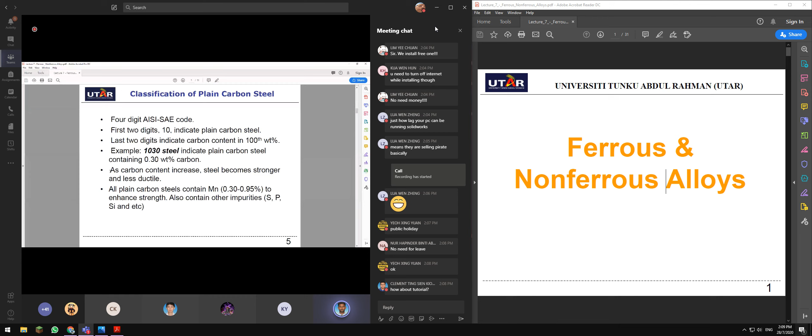Okay, now we are at week 7, so week 7 is lecture 7. Guys, rest assured, for today's topic - lecture 7, 8, 9, 10, 11, 12, and 13 - most of the content will be theory, more information rather than calculation. It'll be very interesting, because lecture 1 to lecture 6 you learned the fundamentals, the know-hows in atomic perspective. Lecture 7 onwards, everything will be on the application side: what kind of application you can use this material for, and what properties this material possesses. You have metals, ceramics, plastic, processing of metals, manufacturing processes of materials, and so on. All of that from lecture 7 onwards will be on the application side, so things will be much more interesting. Let's go through it.

For lecture 7, I'm going to teach you the types of ferrous and non-ferrous alloys. So guys, what is ferrous and non-ferrous alloy in the first place? You can write it down.

Ferrous means an alloy that contains iron. Non-ferrous means an alloy that doesn't contain - I don't like to use 'doesn't contain', okay. It does contain iron, but in a very insignificant quantity. The quantity is insignificant, not significant. Some people say it doesn't contain, and so on. Wherever there is a content of iron, it does rust. Wherever the quantity of iron is reduced to an insignificant scale, it means there will be no rust. So that is ferrous and non-ferrous alloys.

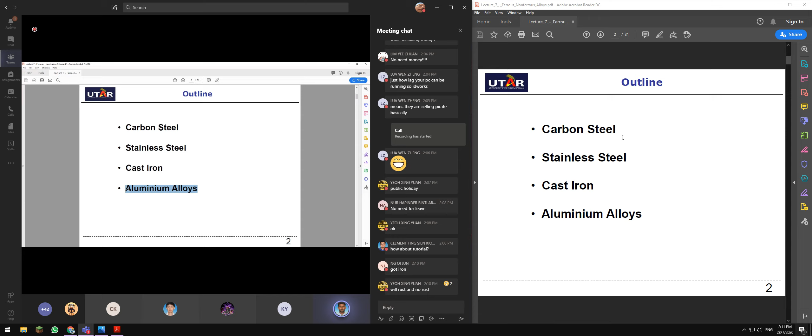The outline of this lecture today: I'm going to teach you the types of carbon steel, what is stainless steel, and what is so big a deal about cast iron, and also aluminum alloys. Aluminum alloys is just less than 10 slides, from slide 26 to slide 31, so I'll cover that this coming Friday, followed by the announcement of your test. Today's lesson is until slide 25, so I'll be covering carbon steel, stainless steel, and also cast irons.

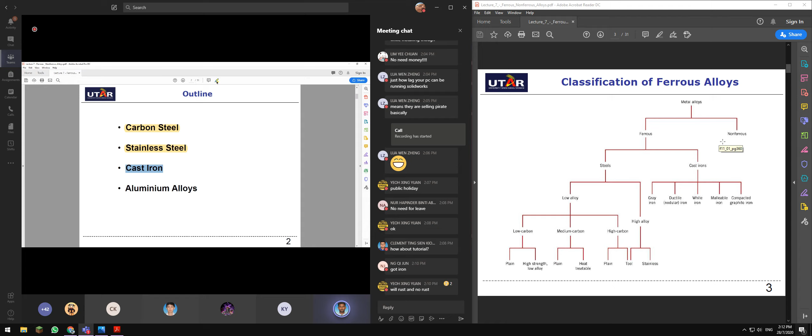So let's go in. Now we have metal alloys. The reason we choose metal alloy to be included in your syllabus is because most engineering achievement, most engineering application, deals with alloys, specifically metals. Further down the road in this subject, I'll also teach you ceramics, plastics, and processing and so on, but let's focus on metal first. Metal classification: we have ferrous alloy and non-ferrous alloy. Let's put aside non-ferrous alloy first and concentrate on ferrous alloy. In ferrous alloy, we have steels and also cast iron.

Okay, we have steels and also cast irons. In steels, we have low alloy and high alloy classification. Under low alloy, we have low carbon steel, medium carbon steel, and high carbon steel.

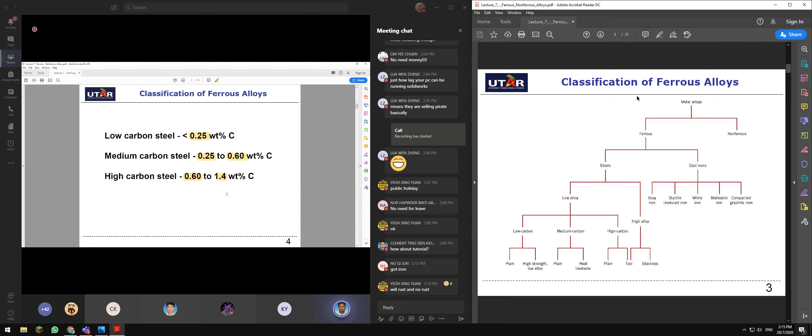Low carbon steel: the content of carbon is generally less than 0.25 weight percentage of carbon. Medium carbon steel: the carbon content is around 0.25 to 0.6 weight percentage of carbon. Whereas for high carbon steel, the carbon content is above 0.6 to 1.4 weight percentage of carbon. So these are the classifications for low, medium, high carbon steel.

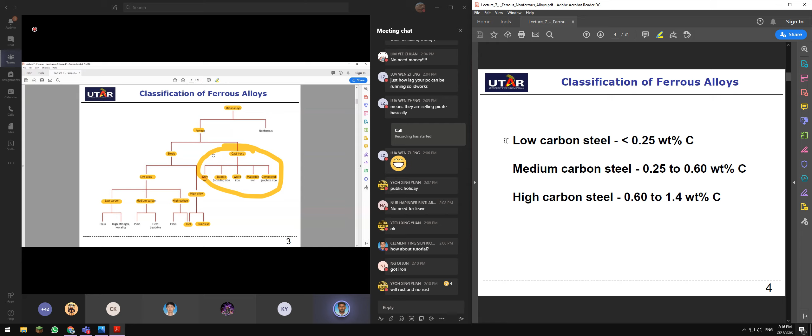So you might ask me, what about carbon content of 1.4% and above? All those are categorized as cast irons. Cast iron has very high carbon content.

Now, classification of plain carbon steels. You know that low, medium, high carbon steel variation is carbon content. Prior to this topic, in lectures 5 and 6, I taught you about addition of alloys - molybdenum, tungsten, nickel, chromium - and also the carbon content varies a lot.

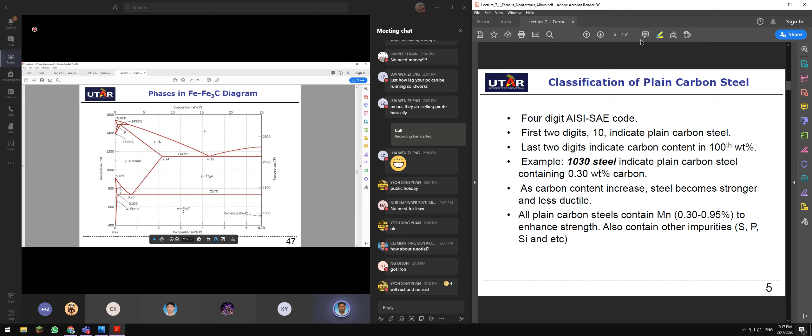You can go for 0.1% of carbon, 0.2, 0.025%, any percentage will do, as long as you are complying with the rules of the phase diagram for the iron carbon system, where your maximum carbon content can only be until 6.70. So from this, you should be able to imagine that there are lots of classifications of steels.

That is the reason why material engineers need to come up with the standardization of classification of steel. Therefore, they have come up with the standard of steel that can classify steel according to the carbon content.

The classification always starts with a 4-digit AISI or SAE code. AISI is American Iron and Steel Institute, and SAE is Society of Automotive Engineers.

So in the 4-digit classification of steel, the first 2 digits indicate plain carbon steel. For example, 10 indicates plain carbon steel. So whenever you are looking for a steel, if the steel category starts from 10 something, it means that it is plain carbon steel.

And remember, I told you something about the last 2 digits of the code. The last 2 digits indicate the carbon content. Please take note, the last 2 digits indicate the carbon content.

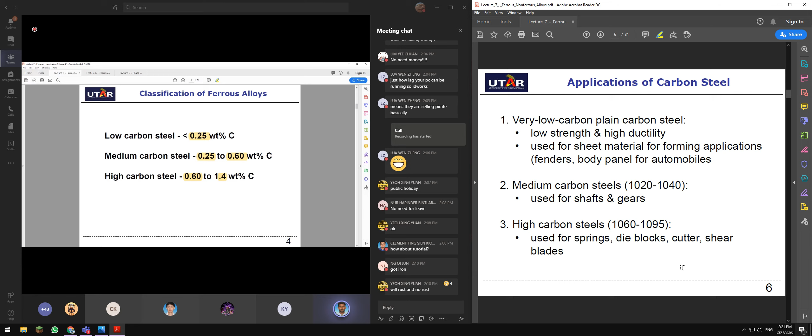Now, applications of carbon steel. Very low carbon plain steel has a carbon content of less than 0.25. When the carbon content reduces, you reduce the strength, and if you reduce the strength, automatically it has much higher ductility because you can slip along the plane. Remember topic number 4, plastic deformation. So it has very low strength and high ductility, and it's used for sheet material for forming applications, for example car body panels or fenders.

Okay, these are very low carbon plain steel. Now, medium carbon content steel, 1020 to 1040, so 0.2 to 0.4 weight percentage. The application of those steels are used for shafts and gears, which require higher hardness.

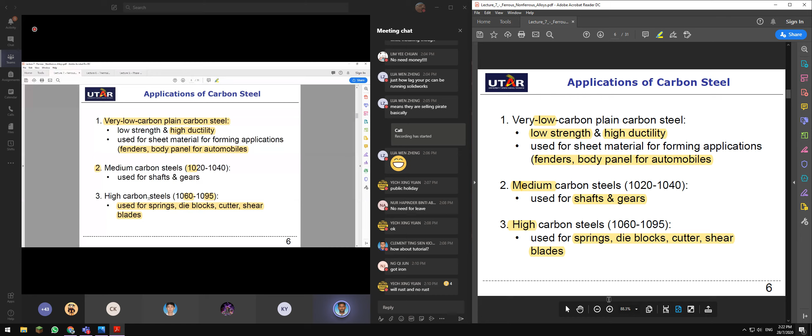High carbon steel, very strong carbon steel, has a content of 0.6 to 0.95 weight percentage of carbon. It's used for springs, die blocks, cutters, or shear blades. Most high carbon steel applications are used for tools, cutting tools, engineering tools, roller mill blocks, and so on.

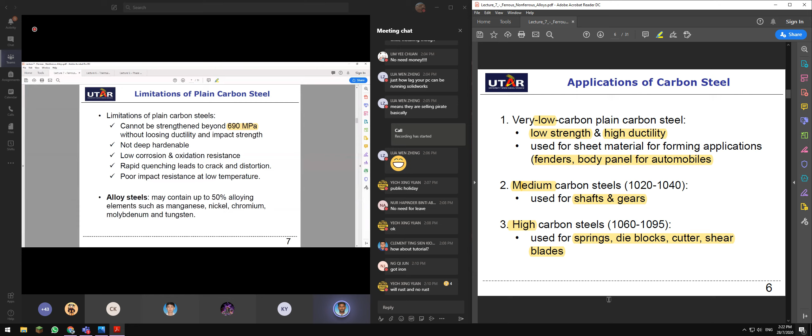Now, what are the limitations? The carbon steel has lots of applications, but it has its limitations as well. One limitation is it cannot be strengthened beyond 690 megapascal without losing its ductility and impact strength. So if you want to strengthen it beyond that, you need to sacrifice its ductility. That's the reason why we have annealing, heat treatment, tempering, and so on.

It is not deep hardenable, remember the term hardenable. It has very low corrosion and oxidation resistance, very easy to corrode. For this plain carbon steel, rapid quenching leads to crack and distortion. Remember, rapid quenching from austenite to martensite leads to crack and distortion because of thermal stress. It also has very poor impact resistance at low temperature. Please highlight all these, you need to memorize them.

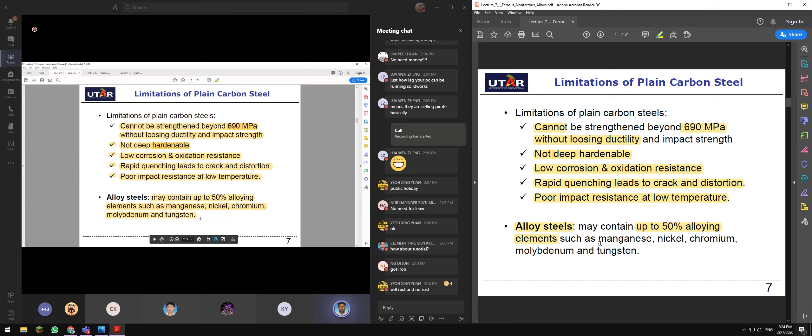Due to the limitations of plain carbon steel, engineers tend to add more of these impurities, like cooking, you add more and see what happens. So alloy steels may contain up to 50% of alloying elements such as manganese, nickel, chromium, molybdenum, and tungsten. When you add more alloying agent into plain carbon steel, it becomes high alloy steel.

The first two digits represent the principal alloying element or group of elements in the steel which contains the highest concentration. The last two digits indicate the content of carbon. Let's see one by one, it's not necessary for you to memorize these, it's just for your information, something like classification of steels.

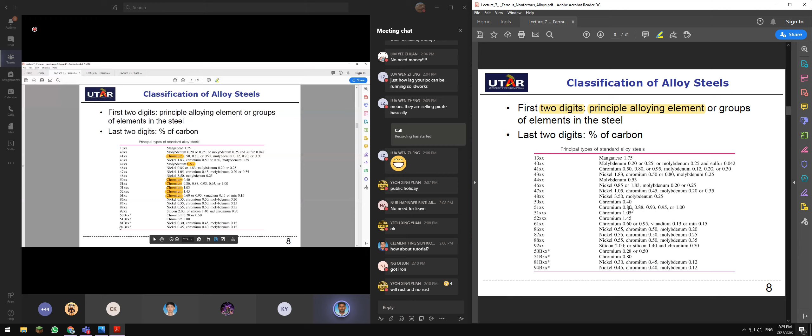So 1,3 stands for manganese at 1.75 weight percentage. 40 stands for molybdenum at this percentage. And 41, if you go to a hardware store and ask for 4120 steel, they'll give you stainless steel, this is stainless steel, chromium. All these are stainless steel. When the chromium content is higher, we call that stainless steel. So 61, 52, 51, 51, 50, all those are stainless steel. 43 is nickel, 46, 47, 48 are all nickel. 44 is molybdenum, having a concentration of 0.53. The list goes on, this list is not exhaustive, there's lots more on it.

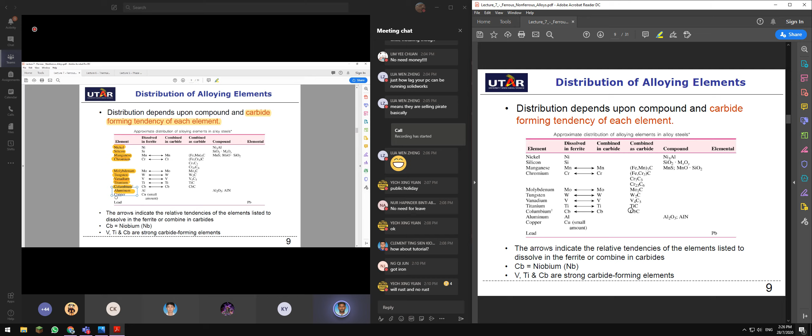The distribution of alloying element depends upon the compound and carbide forming tendency of each element. Carbide is carbon, which is cementite. So if you look at all the elements, these are the elements that can be added into carbon steel to create high alloy steel: nickel, silicon, manganese, chromium, molybdenum, tungsten, vanadium, titanium, columbium, aluminium, copper, and lead. When you add nickel into carbon steel, it will dissolve in ferrite but cannot combine in carbide, and this will be the compound example. When you add manganese in carbon steel, it can dissolve into ferrite and also form a compound with carbon to form carbide. So these are the elements for carbide, and these are the compound examples, the list goes on.

All right, now let's talk about stainless steel. Stainless steel is being categorized as high alloy steel. If you look at slide number 3, it's over here, so stainless steel is categorized as high alloy steel.

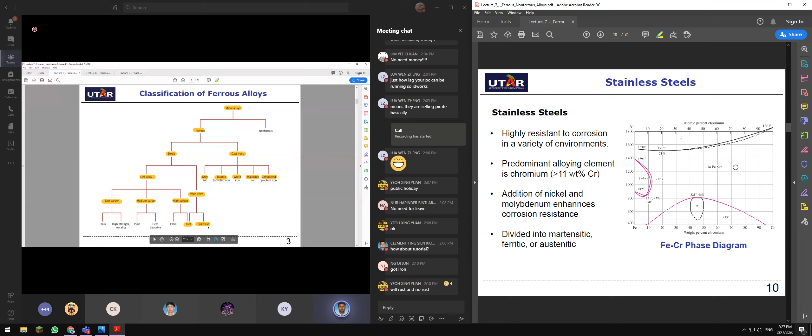Stainless steel is highly resistant to corrosion in a variety of environments. Usually stainless steel is used as your kitchen cutlery and kitchen tools, where most of your spoons or tools in the kitchen are made of stainless steel, because you don't want to eat rust. I'm pretty sure you don't want a rust element in your cutlery.

Predominantly the alloying element is chromium. So in any plain carbon steel, when the chromium weight percentage is above 11%, we call that stainless steel. Regardless of chromium, when you add nickel and molybdenum, it will also enhance the corrosion resistance.

This stainless steel can be divided into martensitic, ferritic, and austenitic stainless steel. Remember guys, martensitic, ferritic, and austenitic refer to the crystalline structure properties of the material. For example, ferritic is BCC, austenitic is FCC, martensitic is BCT (tetragonal).

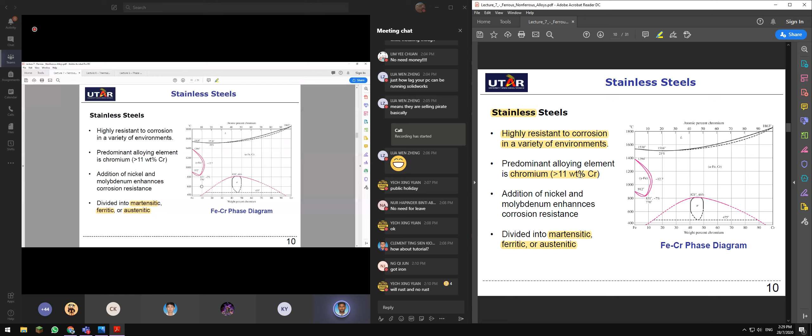Ferritic stainless steel is an iron and chromium binary alloy containing at least 12 to 30% chromium, and it is in BCC phase. The chromium extends the alpha region, which is ferrite, and suppresses the gamma region, forming the gamma loop, which is austenite.

The properties of ferritic stainless steel: it is magnetic, and this material can be hardened and strengthened by cold working. If you want to increase mechanical properties in terms of tensile strength and yield strength, you can cold work it by reducing the surface area of the material. Ferritic stainless steel is low cost and used as a construction material requiring heat and corrosion resistance.

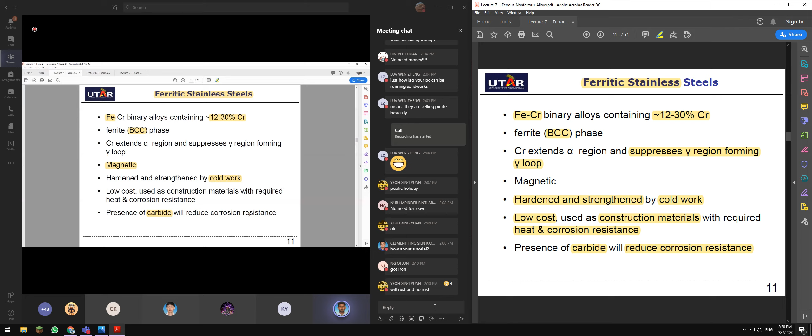The presence of carbide will reduce the corrosion resistance. Remember guys, the higher the presence of carbide, the more corrosion will exist. That is the reason why, if you look at carbon steel, between low, medium, and high carbon steel, high carbon steel is more prone to corrosion because the carbon content is higher.

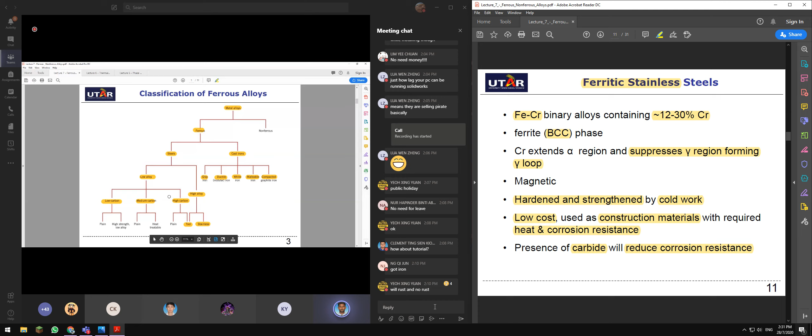Now let's look at martensitic stainless steel. Martensitic stainless steel is an iron alloy containing 12 to 17% chromium and 0.15 to 1% carbon, whereas ferritic is 12 to 30% chromium with very little or insignificant carbide. Here we have some carbon content, between 0.15 to 1%.

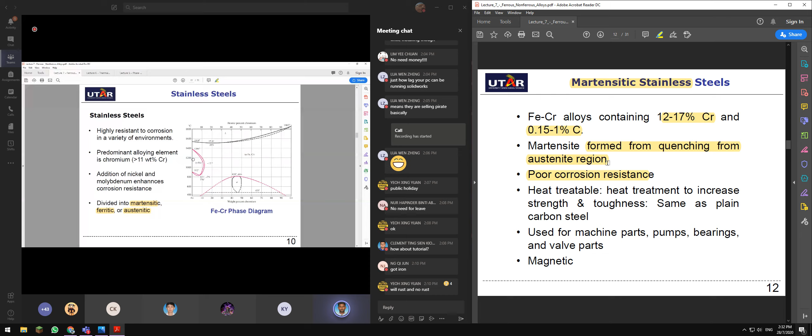For you to have martensitic stainless steel, what do you need to do? You need to heat it up, let's say the chromium content is 17, to a temperature above the critical temperature, then cool it down rapidly by quenching, reducing the temperature to room temperature so it forms martensitic stainless steel. So martensitic stainless steel forms from quenching from the austenitic region in the phase diagram.

It has a very poor corrosion resistance - please highlight this. It is corrosion resistant, better than plain carbon steel, just that when comparing with other stainless steels, like ferritic or austenitic stainless steel, martensitic stainless steel has very poor corrosion resistance, but it has higher strength.

Martensitic stainless steel is heat treatable, and heat treatment is used to increase strength and toughness, the same application as for plain carbon steel. You can use heat treatment to increase strength and toughness of the material, but for ferritic stainless steel you can't, because the carbon content is too low. You can also do it by cold working, where you purposely create plastic deformation. Remember cold working, guys? Try to recap back on cold working.

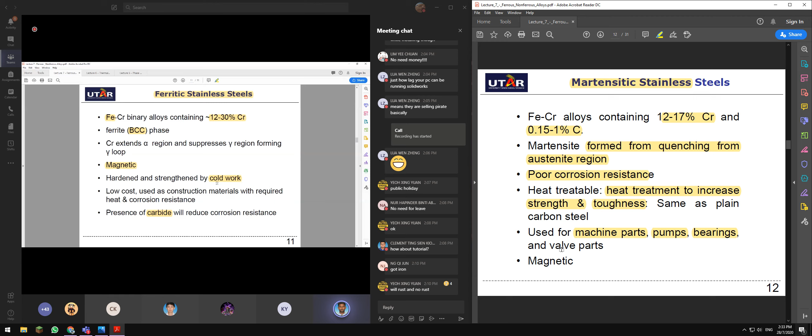So martensitic stainless steel is tough and has higher strength with a little sacrifice on corrosion resistance. This stainless steel can be used for machine parts, pumps, and bearings. Remember bearings, guys? Bearings must be corrosion resistant and very hard, so they use martensitic stainless steel, which tends to show some corrosion after some time. It is also used for valve parts.

Okay, and martensitic stainless steel is also magnetic, right?

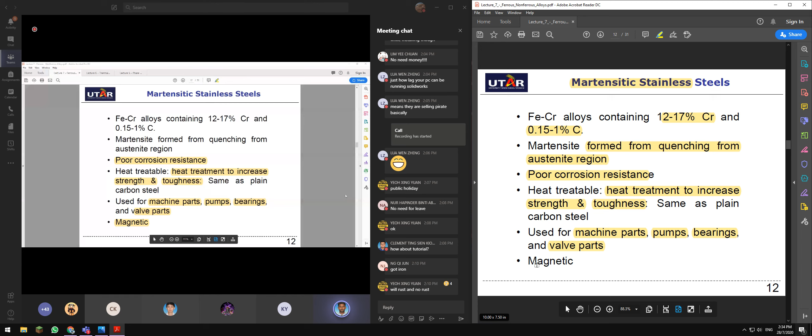Now let's talk about austenitic stainless steel. Austenitic stainless steel is FCC, and the chromium content is in the vicinity of 16 to 25 weight percentage, and you have nickel content as well, which is 7 to 20 percentage, and these are ternary alloys. Martensitic is not a ternary alloy, it has only chromium content and also carbon content. For austenitic stainless steel, you have iron, chromium, and nickel, 7 to 20 percentage.

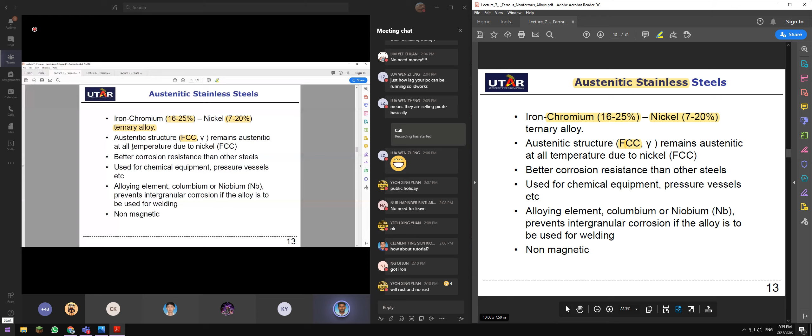So austenitic structure, which is FCC, austenite is FCC here. This remains austenitic at all temperatures due to nickel. Nickel is also FCC.

Austenitic stainless steel has better corrosion resistance than other steel because the carbon content is much lower. And it has a better corrosion resistance than other steels. Austenitic stainless steel is used for chemical equipment, wear resistance, pressure vessels, and etc.

And the alloying element for austenitic stainless steel can be columbium or niobium that prevents intergranular corrosion if the alloy is to be used for welding. So remember, guys, nickel plays a huge role in corrosion resistance as well. It is being stated here that nickel enhances the corrosion resistance.

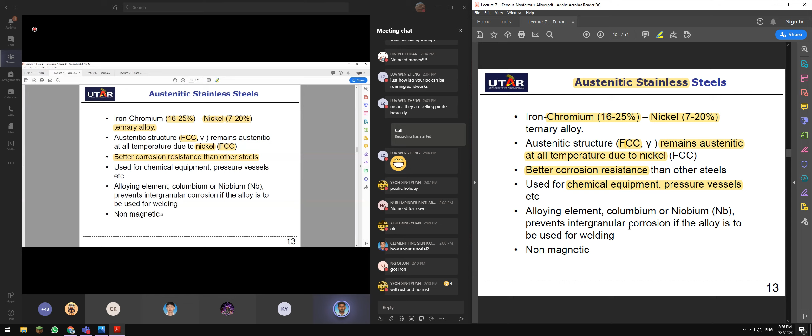And austenitic stainless steel is non-magnetic, whereas for martensitic stainless steel, it is magnetic. And for ferritic stainless steel, it is also magnetic.

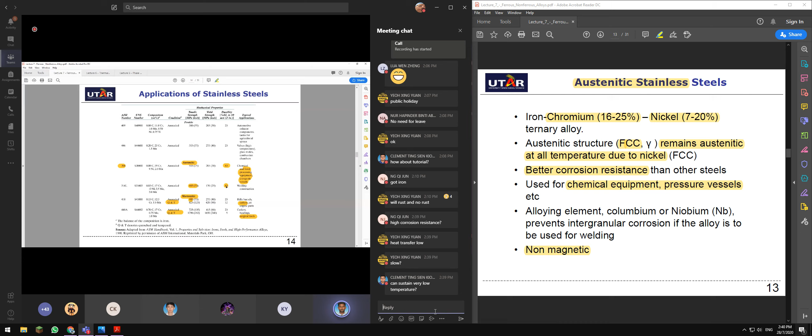So, guys, your assignment. I will give you this, this is the one that you need to do. You need to research on this. I will give you the assignment next week, based on it, and you need to do research on the material to come up with why this material qualifies for the application.

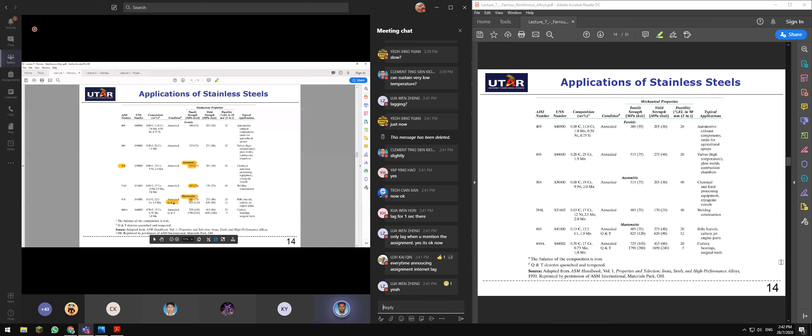Okay guys, just a quick recap. Stainless steel, we have three types: martensitic, ferritic, and austenitic. These are the properties of ferritic, martensitic, and also austenitic.

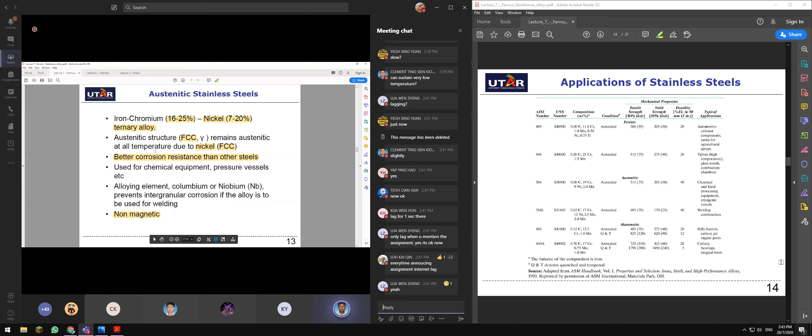And if you reduce the alloy in your plain steel, we call that carbon steels. In carbon steel we have three types: low carbon steel, medium carbon steel, and high carbon steel. Remember, as a rule of thumb, higher the carbon content increases the strength, reduces the ductility, and increases the brittleness.

So low carbon, medium carbon, high carbon. Low carbon is 0.25 and below. Medium carbon is 0.25 to 0.6. High carbon steel is 0.6 to 1.4. Okay.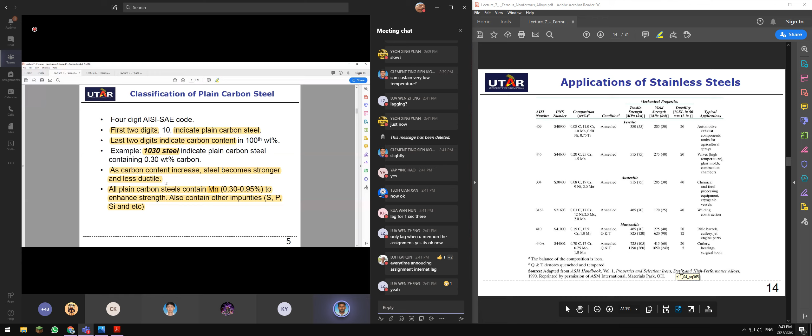Alloy steel may contain up to 50% alloying elements such as manganese, nickel, chromium, molybdenum and tungsten. If you look at the classification here, you have plain low carbon steel and high strength low alloy steel. High strength means it might be martensitic or quenched heat-treated steel. Same goes here, plain and heat treatable, and here we also have plain and tool steels.

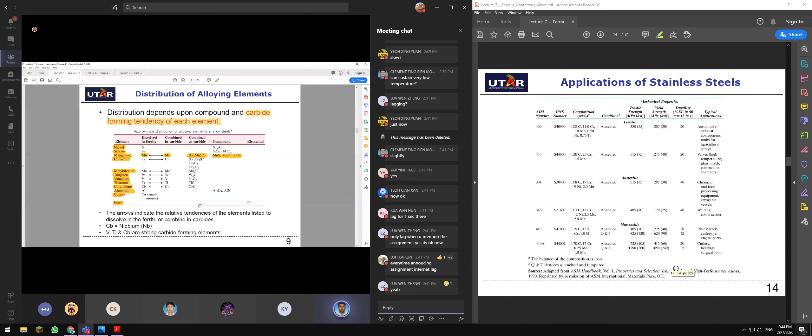High alloy steel has an alloying element content higher than... 50%, yeah. So this classification is under here. All right guys, any questions so far? Simple, right? Topic 7 onwards, everything is very simple. Is it simple or is it difficult for you to digest?

Any questions guys? Is the carbon content always less than 1%? For which one, Xua Wen Hun? Which one are you referring to? Carbon content for which alloy? Is it low, medium carbon, or high?

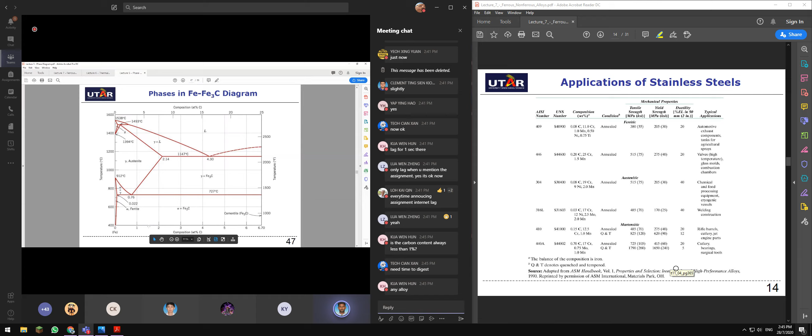Any alloy, okay. For low alloy, the carbon content is classified up to 1.4. Above 1.4, if you look at the iron carbon diagram, above 1.4 somewhere around here, okay, you have another classification of steel, but above 2.1, carbon content of 2.14 or 3%, 4%, 5%, or 6% weight percentage, we call that cast irons, which I'll be covering in a while. Carbon content is much higher there.

Wen Hun, higher carbon content is over here, lower carbon content is here, and the carbon content classification goes until here. High carbon steel is up to 1.4, not less than 1.

Right? Teoh Can Xan, you need time to digest, so maybe I can help you on that. If you look at the skeleton of this topic, all steel is made of iron, right?

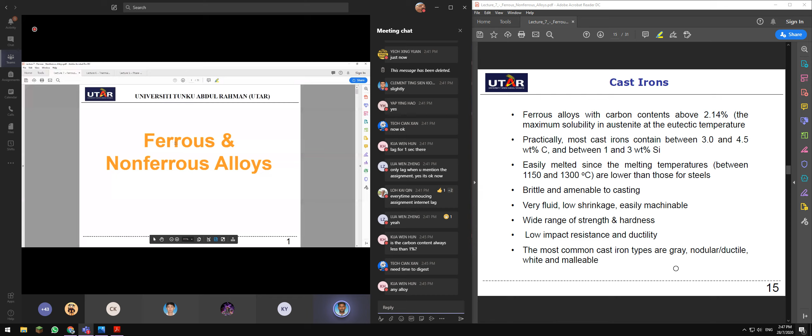So you have iron and non-iron. Now let's focus on iron. In iron we have steels and cast iron. Steel classification has a carbon content around the vicinity of 0.25 to 1.4. Higher carbon content we call cast iron. Under steel classification we have low alloy, which has very little alloying element, about 1% to 2%.

If in this alloy steel we add more alloys regardless of carbon content, we call that high alloy. And how much is the more alloy? It is 50% and above. That's all, as simple as that.

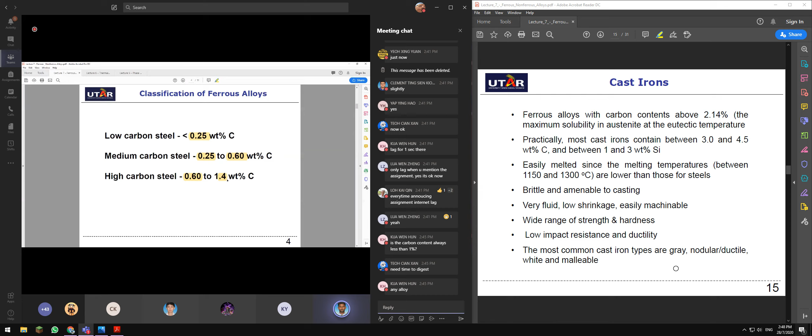So carbon content remains the same: low carbon 0.25, medium carbon 0.25 to 0.6, high carbon 0.6 to 1.4. Anything higher than this we call cast irons. Okay, it's as simple as that, very straightforward. Any other questions guys before I continue?

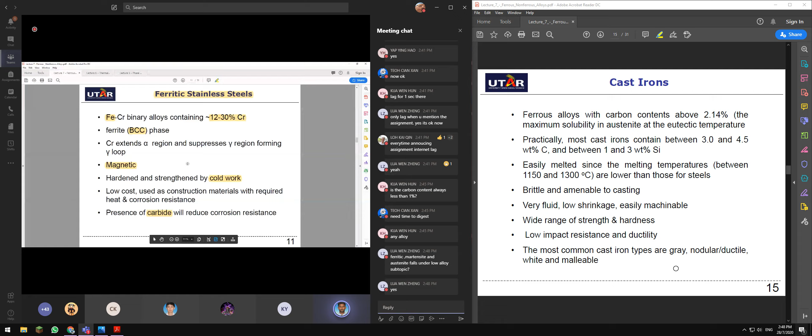Any other questions? Ferritic, martensitic, and austenite fall under low alloy subtopic? Nope, wrong, Lua Wen Zheng. Ferritic, martensitic, and austenite - are you referring to slide number 11 or slide number 10? Lua Wen Zheng, okay, no, wrong. Ferritic, martensitic, and austenite stainless steel - we are talking about stainless steel, these are under high alloy content, high alloys. Over here, stainless steel.

It's over here. Okay, in general it is under high alloy content. All right, so all these are what they call high alloy steel.

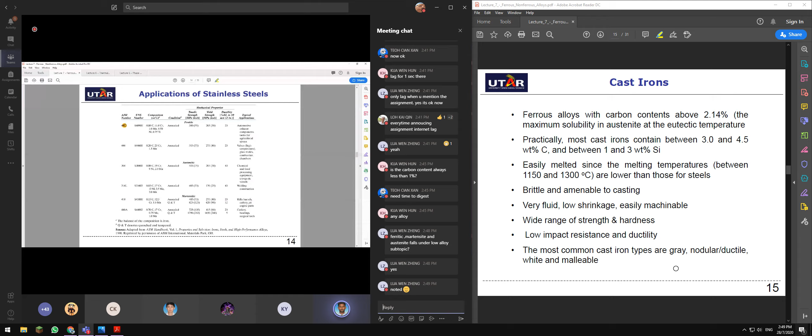All right, okay, so you can look at the composition here: 0.08% carbon, 11% chromium, 1% manganese, 0.5% nickel, 0.75% titanium for this number. Okay, all right, any other questions guys? Okay, since there's no question, we are good to go.

Let's carry on, so now let's talk about cast iron guys. Cast iron, right? So now I'm about to teach you on cast irons. So cast irons are over here - it's too much of diagrams.

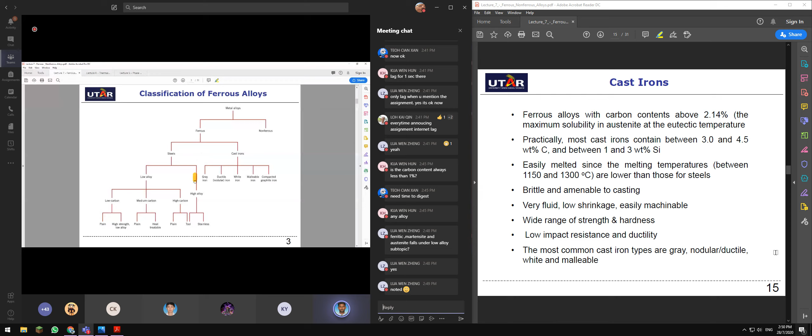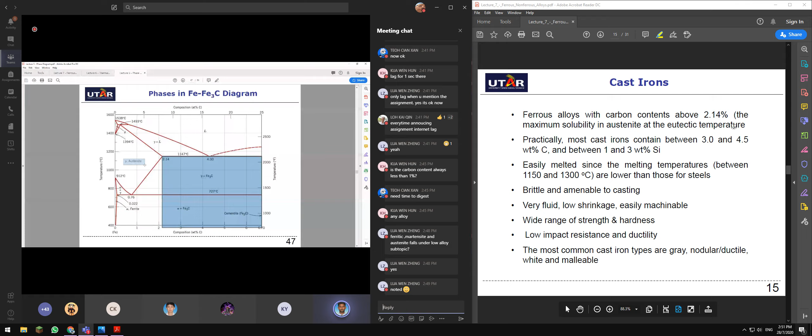Okay, now we are under metal alloys, ferrous, and cast iron. So cast iron, the keyword here is a ferrous alloy with carbon content above 2.14. That's very high carbon content. Above 2.14 is the maximum solubility in austenite at the eutectic temperature, which is 1147.

Practically, most cast iron contains between 3 to 4.5 weight percentage of carbon and between 1 to 3 weight percentage of silicon. Not necessary for you to highlight this, but just get to know it.

Remember, the higher the carbon content, the lower the melting temperature. I've stated this in the previous lecture. Higher carbon content makes cast iron easily melted, since the melting temperatures between 1150 and 1300 are lower than those for steels. Look at the melting temperature here: 1147. If the carbon content is reduced, you see 1200, 1400, and so on.

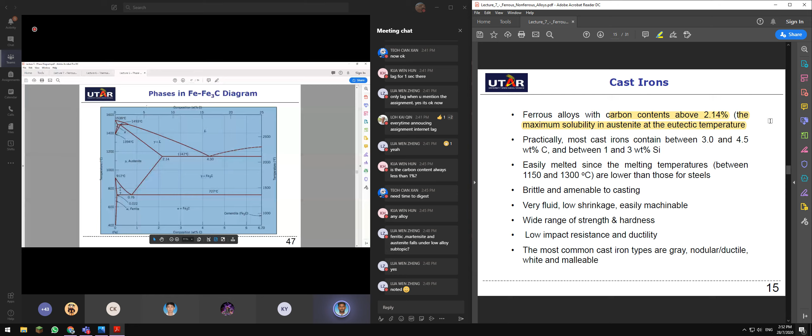So this is the mother of all slides. You need to refer to the phase diagram.

When you add more carbon, it becomes very brittle and amenable to casting. That's why we call it cast iron — cast irons are easily casted. For casting, there will be a brand new topic which I'll discuss in the weeks to come, on the processing of metals. We have a few types of casting: investment casting, sand casting, lots of types. Whenever there's casting of metal, you need to use cast irons.

Another reason cast irons are good for casting is that they are very fluid and have very low shrinkage — they don't shrink much. Also, they're easily machinable. Cast iron has a very wide range of strength and hardness.

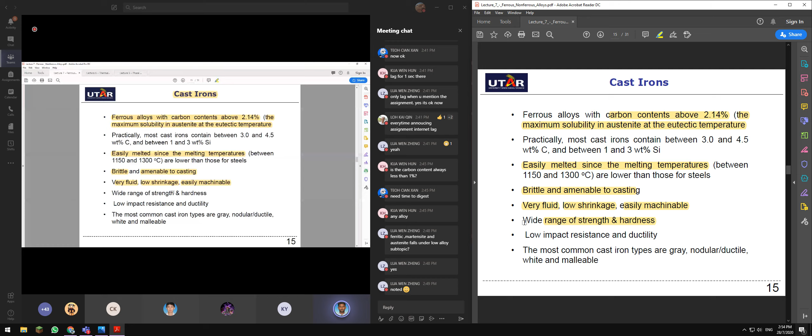For example, you have gray cast iron, ductile, white, and malleable. All of these have very distinguished strength and hardness. Highlight this: cast iron has very low impact resistance and ductility.

The most common cast iron types are gray, nodular or ductile, white cast iron, and malleable cast iron. Highlight these.

Now let's go one by one. Graphite formation in cast iron. This is the phase diagram for cast irons, showing the formation of carbon. Most cast irons are a mixture of alpha, which is ferrite, and austenite, along with a mixture of graphite. Graphite is essentially carbon, just in a different crystal structure — that's why we call it graphite.

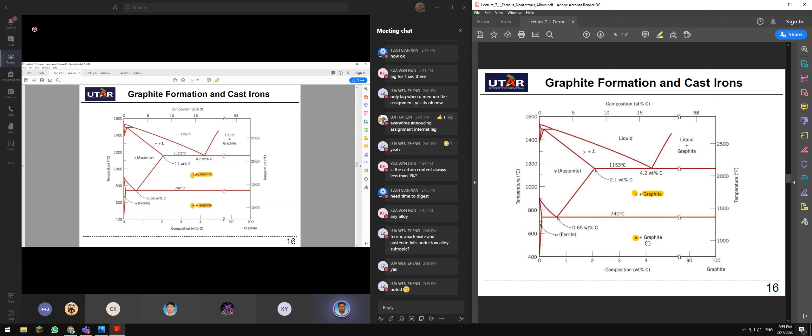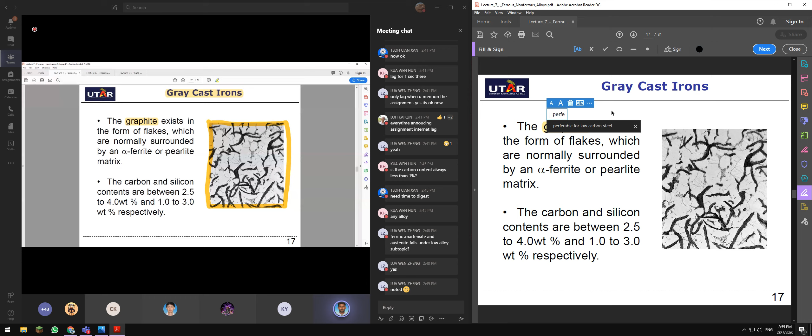Now let's talk about gray cast iron. If you look at the microscopic view of gray cast iron, the graphite — these are the graphites, which are carbon — exists in the form of black flakes, normally surrounded by alpha ferrite, which is BCC, or a pearlite matrix. So cast iron is essentially pearlite having graphite.

The carbon and silicon contents are between 2.5 to 4 weight percentage carbon and 1 to 3 weight percentage silicon. That is gray cast iron.

It's more brittle — brittle in tension. But if you compress it, the strength and ductility are much higher.

Something like tar roads. Let's say you have equipment to cut the surface of tarmac, essentially a road, into a dumbbell shape, and you do some mechanical testing on it. You try to elongate it — you can't elongate a road, right? Because it is brittle.

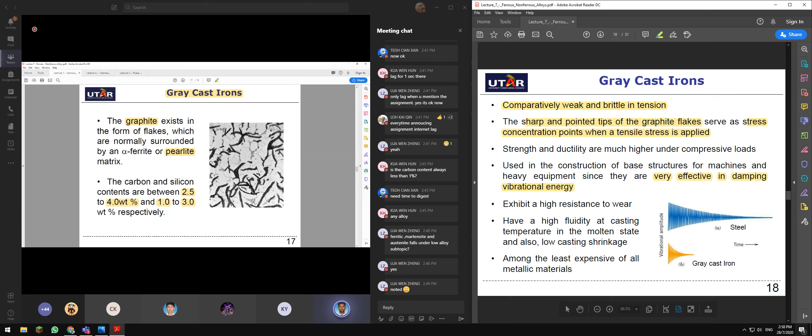Different story when you compress it. Strength and ductility are much higher under compressive loads.

Grey cast iron is used in the construction of base structures for machines and heavy equipment, since it is very effective in damping vibrational energy. Grey cast iron also exhibits high resistance to wear, and it has very high fluidity when casting, so it can cast complex shapes in the molten state, with low casting shrinkage. Grey cast iron is among the least expensive of all metallic materials.

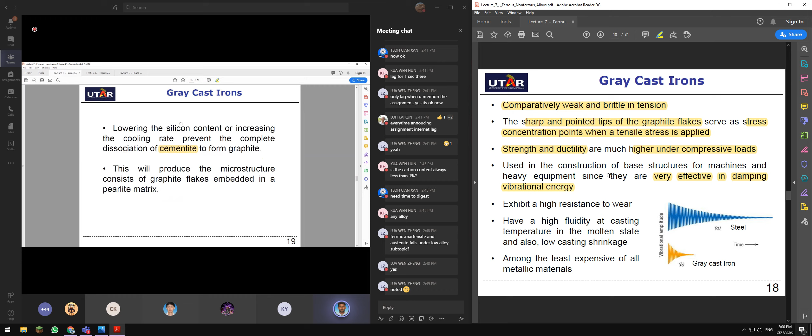Under grey cast iron, you can also further modify the content by lowering the silicon content or increasing the cooling rate. This prevents the complete dissociation of cementite to form graphite. Remember, cementite is the carbon content. So lowering the silicon content or increasing the cooling rate prevents the complete dissociation of cementite to form graphite, and this produces a microstructure consisting of graphite flakes embedded in the pearlite matrix.

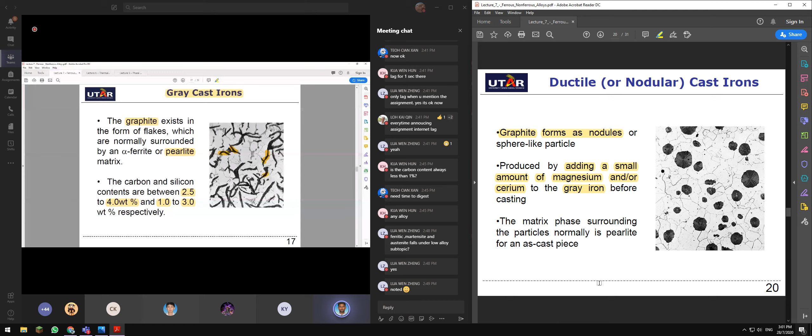Next, let's look at ductile or nodular cast iron. Another classification of cast iron is ductile, or nodular cast iron. If you look at the microstructure, graphite forms as nodules or sphere-like particles. Whereas if you look at grey cast iron, the graphites are more of a flake or rod shape. Nodular cast iron's graphite is more of a nodule or sphere shape.

Ductile cast iron is produced by adding a small amount of magnesium and/or cerium to grey iron before casting. So essentially this is grey cast iron, and when you add a small amount of magnesium or cerium before casting, you are creating ductile iron.

The matrix phase surrounding the particles is normally pearlite for an as-cast piece. A heat treatment of several hours at about 700 degrees Celsius will yield a ferrite matrix, just below that temperature.

Castings are stronger and much more ductile than grey iron. These castings have very high strength and are more ductile than grey cast iron. Ductile cast iron retains ductility while having high strength as well, so its mechanical characteristics approach those of steel. For example, ferritic ductile irons have a tensile strength ranging between 380 to 480 megapascals and a ductility of 10 to 20% elongation.

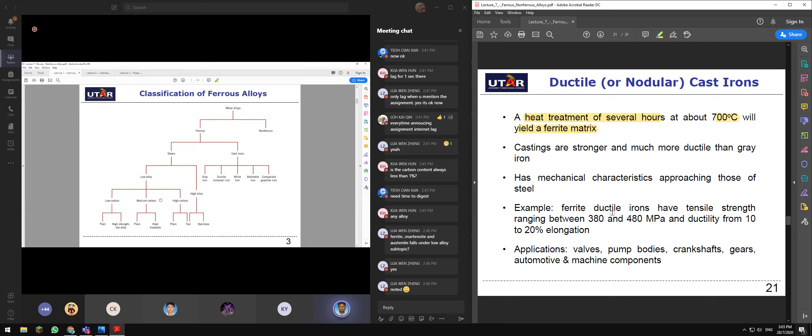Most low alloy steels with high strength, such as high carbon or medium carbon steel, have high strength but at the expense of ductility. But nodular cast iron has the strength of steel while also having very high ductility.

Since they have these properties, nodular cast iron is used in applications like valves, because it needs a high strength material, pump bodies, crankshafts as in internal combustion engines, gears, and automotive and machine components.

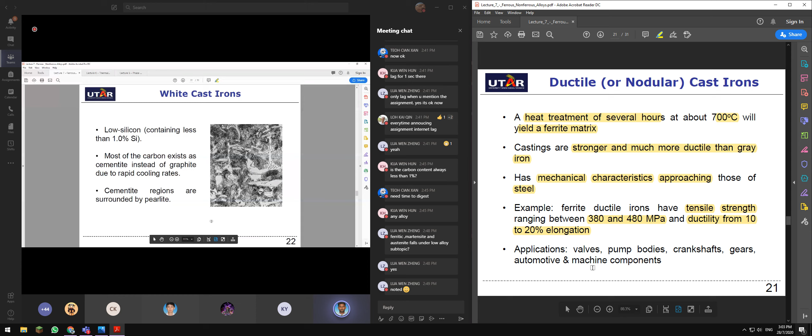Next, let's look into white cast iron. Its classification has very low silicon, containing less than 1%, whereas grey cast iron has 1 to 3 weight percent silicon. White cast iron, containing less than 1% silicon, has most of its carbon existing as cementite rather than graphite, due to rapid cooling rates.

And these cementite regions are surrounded by pearlites. All these are cementite, being surrounded by pearlite. These are pearlites.

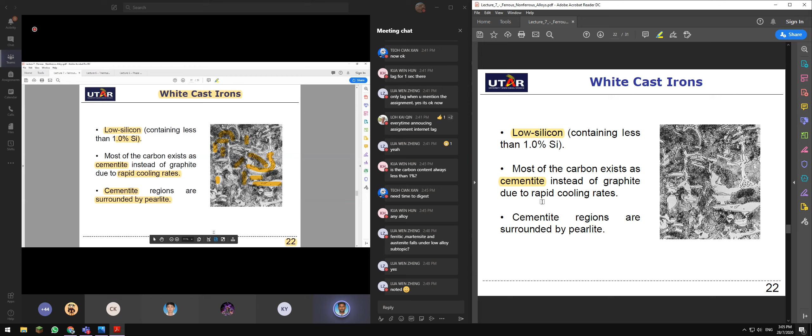Gray iron forms in the interior region which cools more slowly. Usually white cast iron forms on the surface of the cast where there is a huge temperature gradient, because of rapid cooling rates. So if you look into white cast iron, the formation of gray iron happens in the interior region which cools more slowly. And these types of white cast irons are extremely hard and brittle due to large amounts of cementite phase.

These white cast irons are virtually unmachinable because they are very hard and have very high wear resistance. White cast irons are limited to applications that necessitate a very hard and wear resistant surface without a high degree of ductility; it has a very low degree of ductility. For example, you can use white cast iron as a roller in rolling mills.

Remember rolling mills, the video that I shared with you last time, where it shrinks or hot works material from bigger diameter to smaller diameter. So they can use white cast iron as the roller in the rolling mills. And generally it is used as an intermediary in the production of malleable iron.

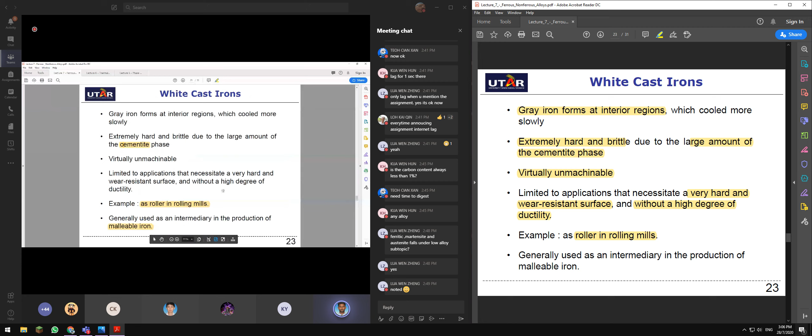So let's talk about malleable cast iron. Now, in malleable cast iron, graphites are in the form of clusters, which is very similar to nodular iron. It's surrounded by ferrite or pearlite matrix.

Malleable cast iron is formed by decomposition of the cementite as a result of heating white iron at a temperature between 800 to 900 degrees for a prolonged time period. Having said that, heat treatment of white cast iron gives you malleable cast iron, that's all. When you heat treat a white cast iron, it gives you malleable cast iron because you are decomposing cementite and forming graphites in the form of clusters or rosettes.

These types of cast iron possess very high strength with appreciable ductility. Remember, white cast iron has very low ductility and very high brittleness. Whereas malleable cast iron has some ductility because you already heat treated it and decomposed cementite back into graphite.

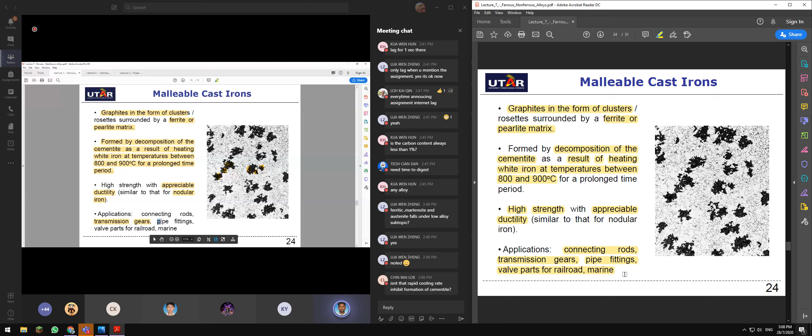So this is very similar to nodular iron, remember nodular cast iron. The applications for malleable cast irons are connecting rods of IC engines, transmission gears, pipe fittings, valve parts for railroad, and also marine applications.

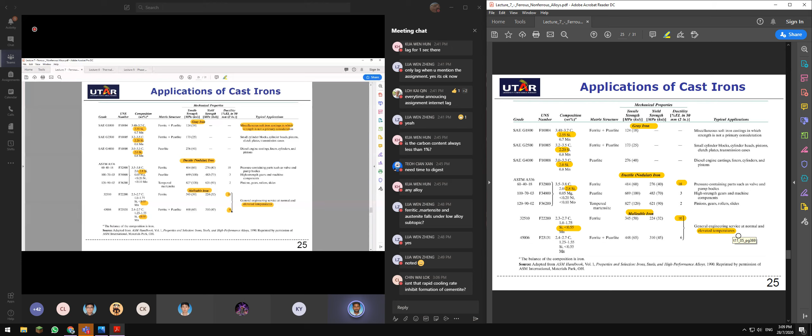If you look at the ductility for malleable iron, it's almost the same as ductile iron. These are the applications for each: the formulation of gray iron, ductile iron, and also malleable iron. For malleable iron, the keywords are elevated temperatures, because at elevated temperatures you need some ductility so that a crack exists as a crack and doesn't fail the part, so you have some ductility.

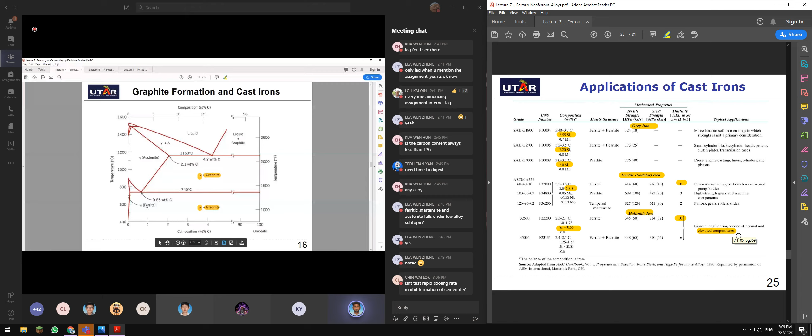Any questions, guys? So all of topic 7 is on the application part, the understanding of the material. Any questions? Doesn't rapid cooling rate inhibit the formation of cementite? That is, if you look at rapid cooling rate...

They're formed by decomposition of cementite as a result of heating white cast iron at a temperature between 800 and 900 degrees Celsius.

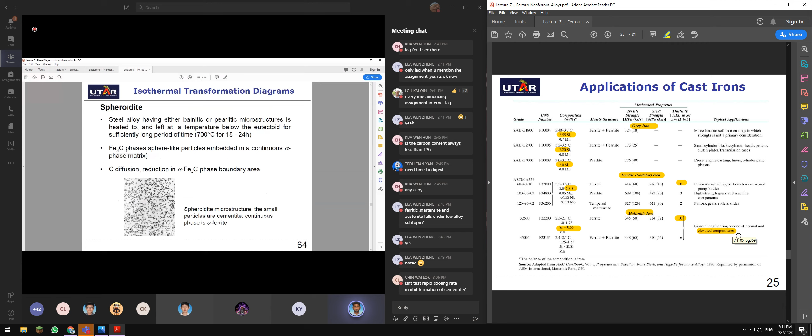But if you look at lecture 5, martensite prevents carbon diffusion. That's the reason why the carbon stays here. With rapid cooling, the carbon doesn't come out from these cells to form carbide.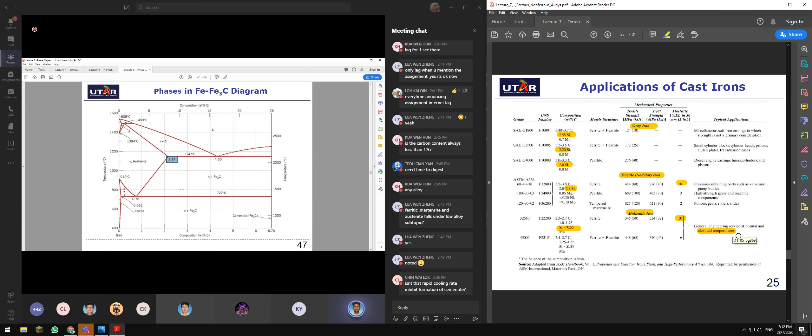Okay. All right, guys. Chin Wai Lok, can you understand? All right.

Okay, let me show you another one. Two point one. Okay, no, not this. Okay, guys, any other questions? Any other questions?

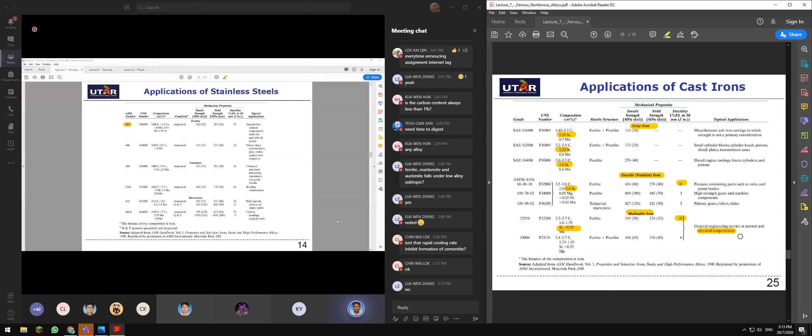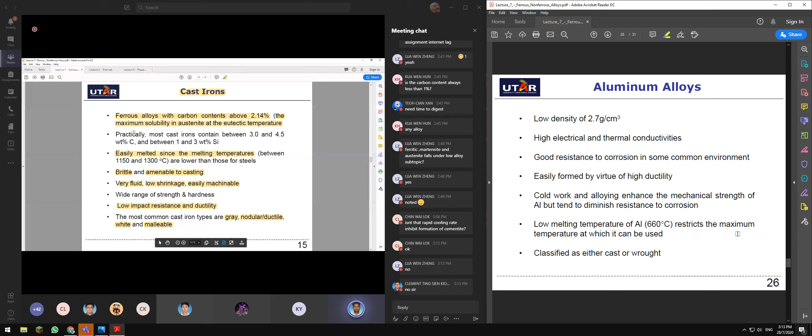Okay guys, so you just need to go through this lesson again to make sure you know each classification of steel. Summary for today's lesson: you need to know what is ferrous metal, what is steel, what is cast iron, and the classification for each steel and cast iron. For steel, you have low alloy and high alloy. What is the difference between them, and what is the percentage? Under low alloy, predominantly it is carbon steel - we have low carbon steel, medium carbon steel, and high carbon steel. For high alloy, your alloying element content is above 5%.

And I've gone through stainless steel. Also, regardless of alloying element, under steel, ferrous, the carbon content is just up to 2.14%. Above that, above 2.1% to be specific, we call that cast iron. It is still ferrous metal, ferrous alloy - don't get confused, cast iron is still under ferrous material, but just that the carbon content is more than 2.14%.

So we call that cast iron. The reason why we call that cast iron is because it is easy to process using casting technique. Why it is easy to use as a casting technique is because it has very fluid, low shrinkage, and is easily machinable. The main reason is because it is very fluid and also has low shrinkage, where you can create complex shapes of the material.

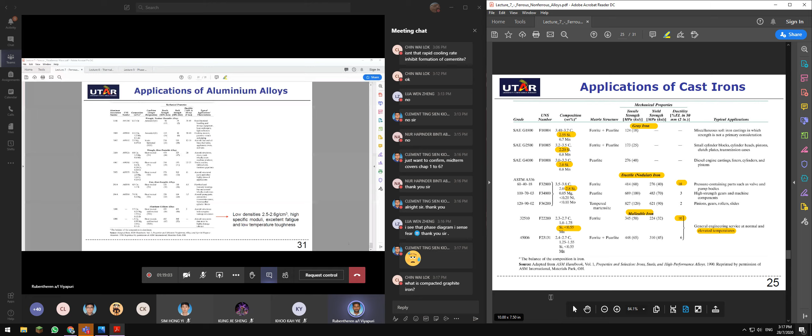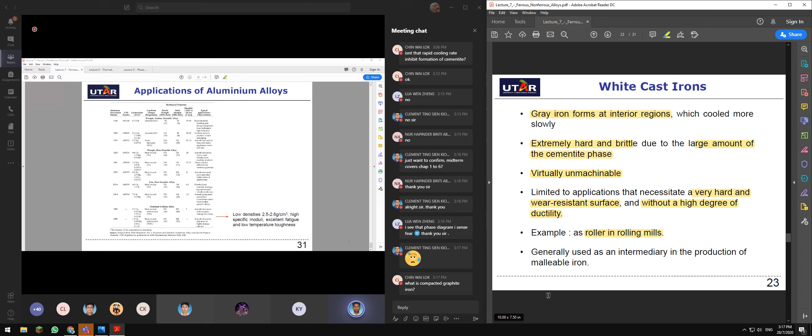Okay, I see the phase diagram - I sense fear. Actually, you can join my tutorial class this Friday if you wanted to, and I'll teach the phase diagram tutorial. It's easy actually, you just need to understand, because lots of information is poured onto the phase diagram, so it's a bit complicated. But once you have mastered it, it is easy, because you're going to repeat the same step again and again.

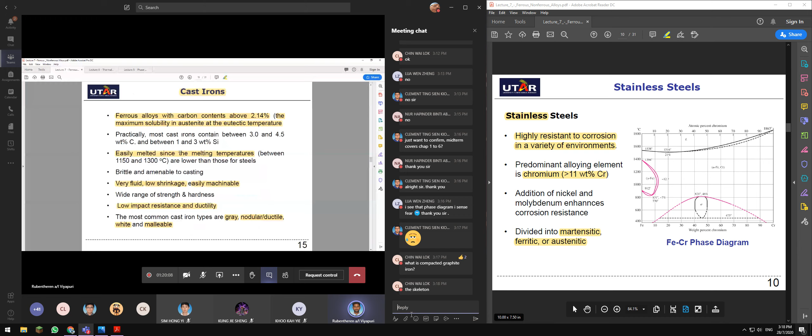Okay, compacted graphite iron. Compacted graphite iron is very similar to ductile iron actually - very similar to ductile iron. Which slide is there? Compacted graphite iron... skeleton over here, yeah. Oh okay, yeah, very similar to ductile iron.

Here, ductile iron. It is a type of cast iron as well, which is not in this syllabus, so I didn't cover that - don't worry about compacted graphite iron. But it is very similar to ductile iron, like from my knowledge, it is very similar to ductile iron, but it is not being covered here, so don't worry about that.

So how long and how many questions again for midterm? Worried about time, okay. There will be 2 questions, 2 hours - 2 questions, 2 hours, 1 hour for each question. And then I'll give you about 30 minutes for you to submit all the necessary documents.

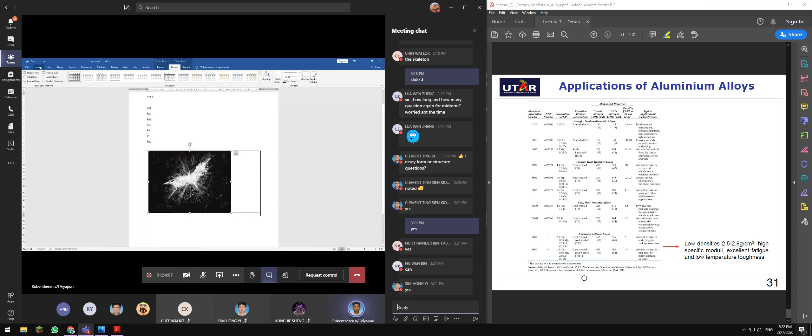This is the easiest way that I've learned. I don't touch this, okay. Then what you'll do is click this, and this figure is referring to question 1. Then I click this, and on the design border, I'll remove the border.

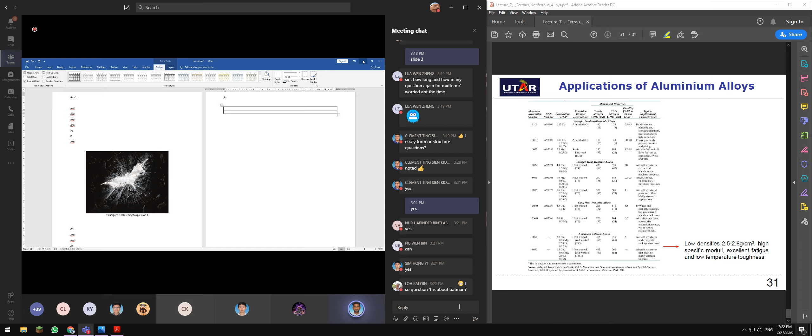That's all, finish. Then you have question 2, answer blah blah blah. Then you want to add a figure in question 2, insert table, because the reason I insert a table is it will perfectly align the image. When I want to add another image, I just click on the other image, paste it here. See, it's perfectly aligned on the table.

Resize it and make it center. This figure is assigned to question 2, make it center. Then you're done, click here and remove the borders. That's all. Okay, this is question 2. This is how I'll do it. I'll just insert a table.

So question 1 is about Batman. This is the image that I have on my desktop. So you got it right, it's easier. Instead of dragging and dropping an image - let's say I drag the same image into the Word document - it loads and it is huge. Sometimes it's so huge that it overlaps the whole screen, and the Word document might hang because the size is bigger.

So when I create a table, the Word document will automatically fit the picture into the table. I don't know about you guys, I don't know if you know this or not, but this is how I do it. I might sound outdated, but you might have a better solution for it.

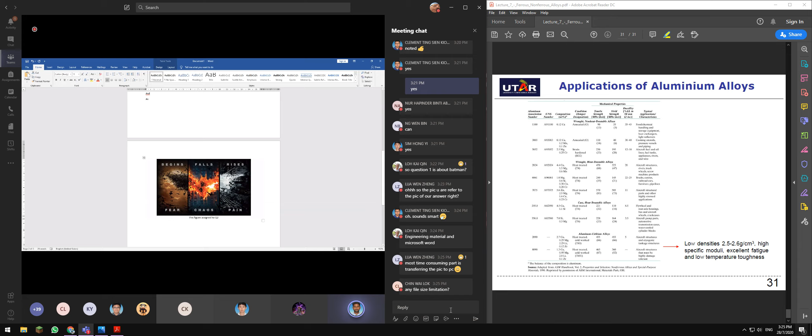This is what my lecturer taught me when I was doing my PhD. I don't know, you might have better ideas. Whenever I want to delete this, it's very difficult - when I press delete, it doesn't delete. So what I do is click this and just Control X, cut. That's all. When I want to delete this, I click the whole image, Control X. I click here, click the whole figure, Control X, delete. That's the delete for me.

You know why students tend to panic when there's a time restriction, so I don't want you to panic. These are the tips I can give you. My hands shake when I take photos, so make sure it is well lit. The most time-consuming part is transferring the picture to the PC.

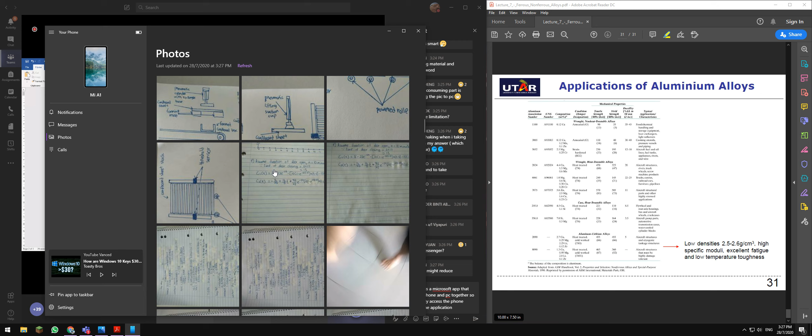Do you have Dropbox, guys? Maybe you can download Dropbox. Dropbox is a file sharing - something like a cloud space for your own personal usage. So download Dropbox on your computer and also on your phone. Whenever you've taken a photo, drop the photo into the Dropbox app on your phone, and it will automatically sync to your computer where the account is associated. Dropbox will never reduce the image size, it transfers it as is. So it's not necessary for you to plug in using a wire. Try to get Dropbox.